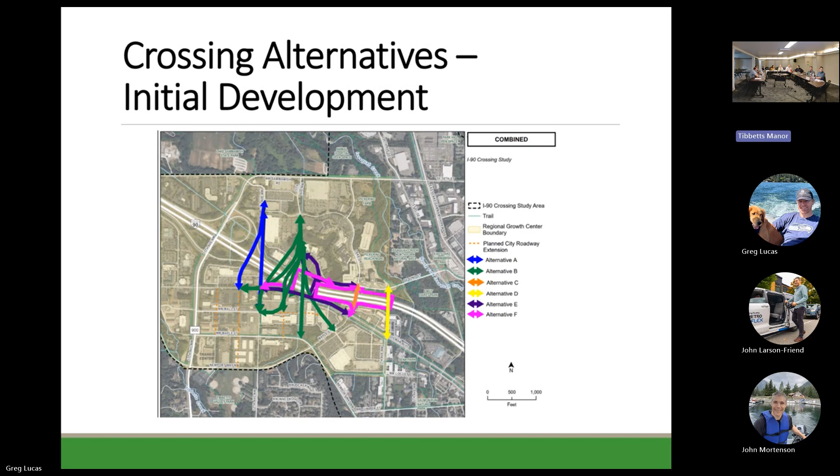Another challenge we have is existing grades, with I-90, Pickering Place and Gilman all being at similar elevations. It's tough to find enough length to get up and over. If I-90 were in a valley, it'd be a lot easier to connect. So we've got to find enough runway to get up and get clearance over.

This is a challenge for us. As we're going through this, we're trying to limit impacts both to existing businesses and structures, as well as thinking about how we think it's going to redevelop, to minimize the impact to future developments. The limited termination points that exist today make it a challenge as well, especially on the north side.

And then we want this to be user friendly. We're trying to make this so everybody's going to want to use it and kind of activate the area. And so after we applied all of these challenges, we kind of narrowed down to 5 concepts.

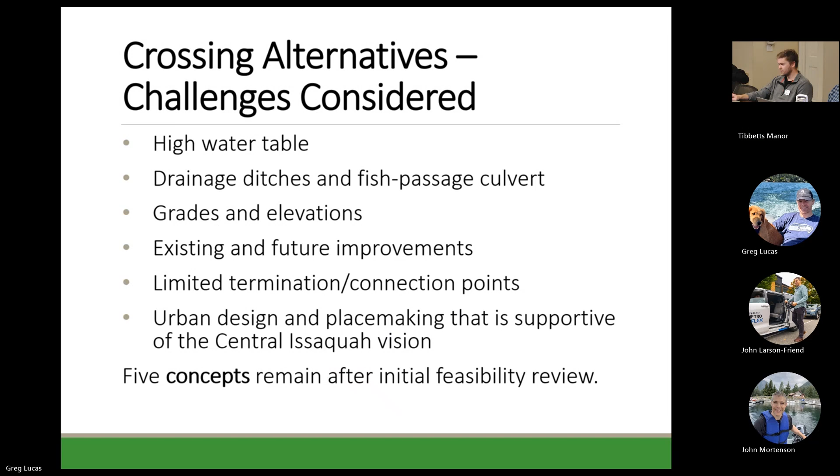Get into those next. More setup question here. I've heard the concept of a lid park thrown about. Is that something you guys are ever talking about, or is that just something I heard here? I heard that in Bellevue too. Well, a lid park, like over the highway.

Seems like whether it's an overpass or underpass would have some pretty big effect. Right, right. Well, I think we have enough lawyers surrounding that. Yeah, exactly.

So kind of working west to east, the first one is 11th Avenue on the north to 12th Avenue on the south. On the south end, you can see it meanders to the west in order to catch as much length to get more grade before we get to I-90. And then however much more clearance we need, we'll have to raise Gilman up, probably 3 to 4 feet, in order to make it work. And it goes up and over I-90, across the drainage area just north of I-90.

And a lot of these alignments aren't set in stone. We're working through this, so it doesn't have to go exactly like this, but we're trying to squeeze between the...

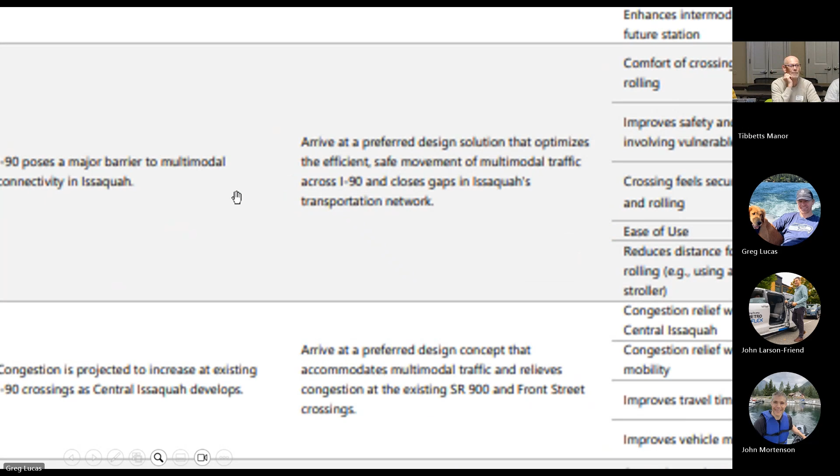One suggestion is the picture is really hard to read. I'm not sure, maybe I'll change that. Can you blow that up on the screen? A little bit, yeah.

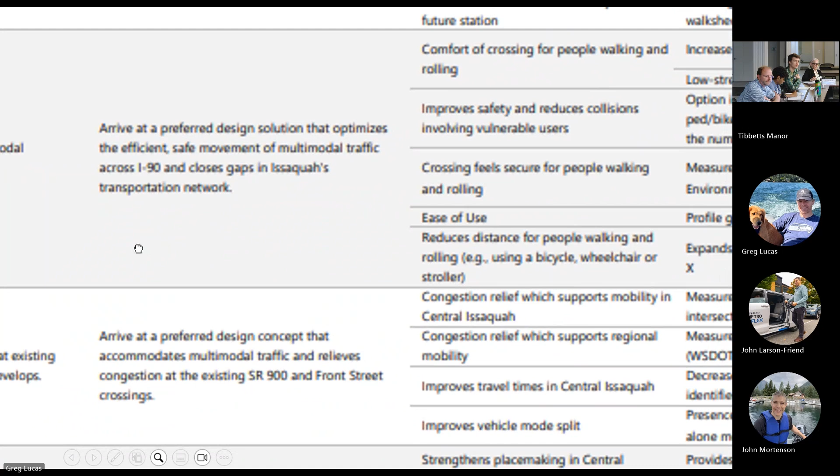All right, the next goal would be to arrive at a concept that accommodates multimodal traffic and relieves congestion at the SR 900 and Front Street crossings.

We're looking at travel times, regional mobility. That can make this project potentially more competitive for grants as well - a project that benefits the growth center, so we can make it more competitive.

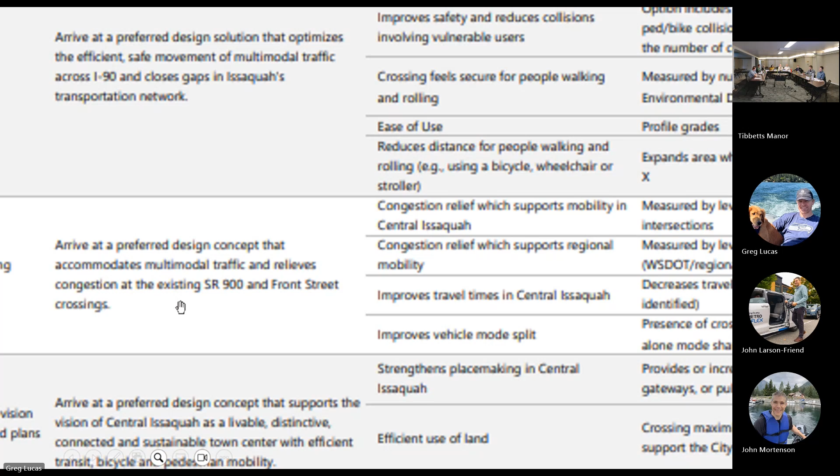Next goal is to arrive at a preferred concept that supports the vision of Central Issaquah as a livable, distinctive, connected, and sustainable town center. It's just how do the crossings meet the Central Issaquah plan?

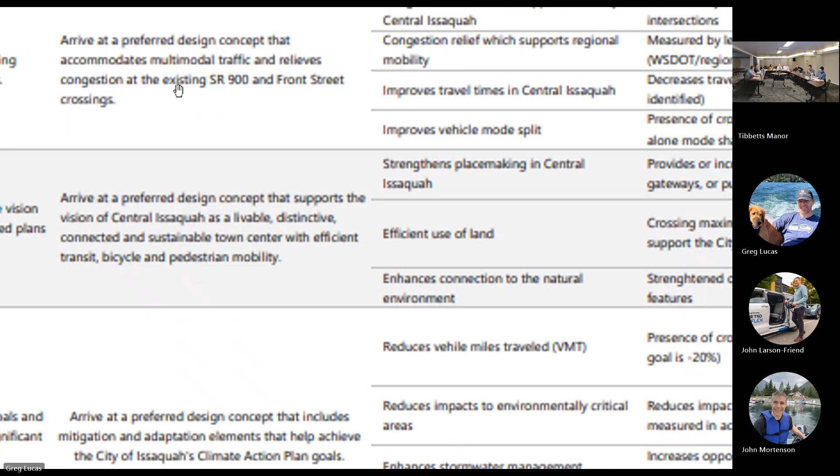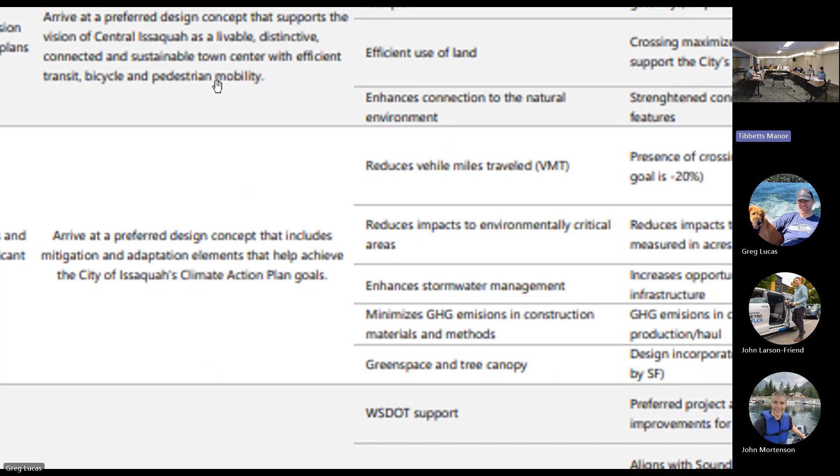Compatibility with that. The next goal: arrive at a preferred concept that includes mitigation and adaptation elements that help achieve the Issaquah climate action plan goals. We have two in here related to transportation - it reduces vehicle miles traveled and reduces dependency on vehicles.

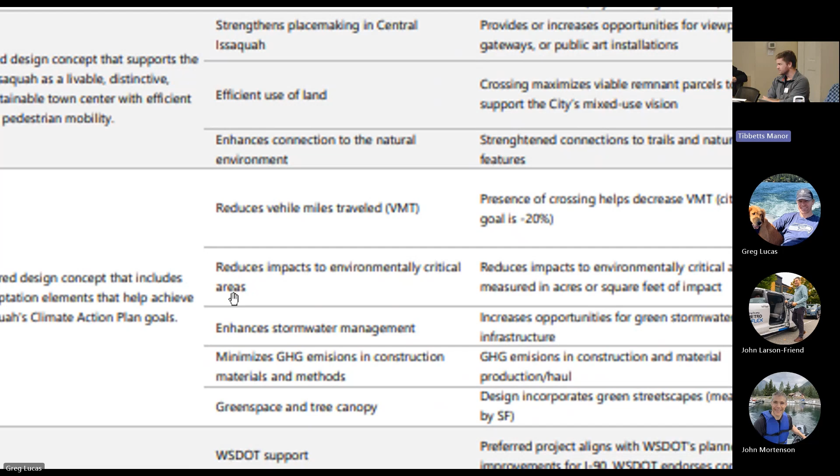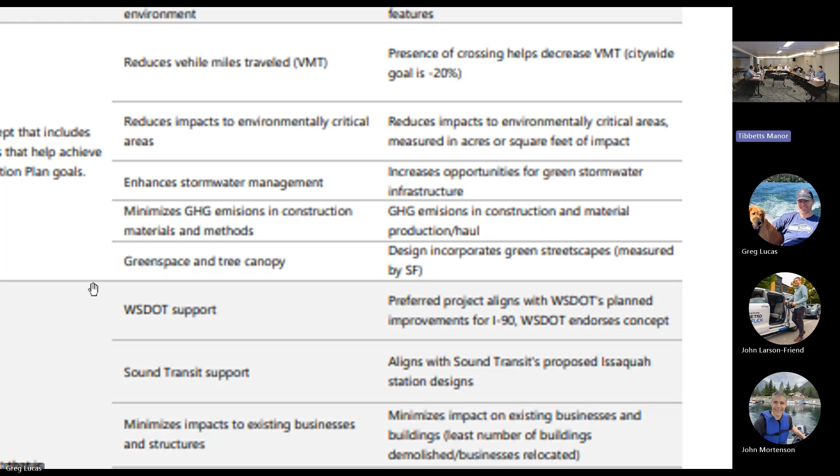The last performance measure for the category is design incorporates green streetscapes, measured by square footage. The last column is kind of initial - how we're going to measure what we want out of this. So those are definitely up in the air.

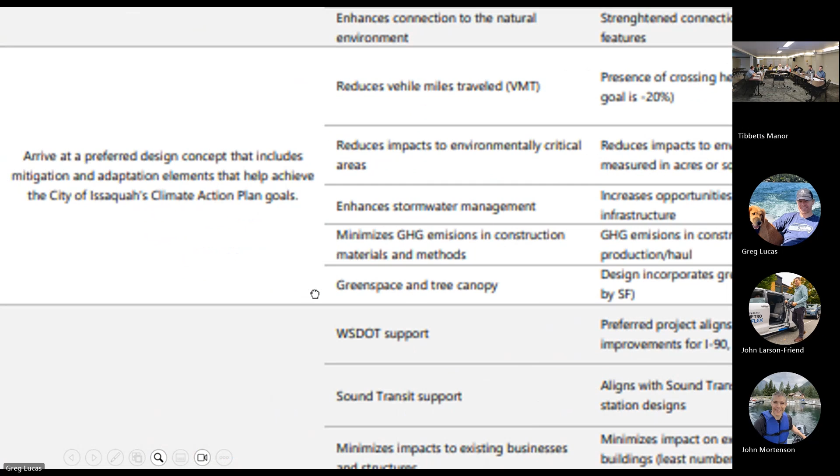Measure what we want - so that's what. Next goal is to arrive at a preferred concept that is constructible and eligible for funding.

Constructability, grant funding, minimize the impacts to existing businesses. I think also in here is reducing the amount of square footage of opportunity for future development.

What does it mean with this crossing increase 15 to 20 minutes, low stress walk shed bike shed? I guess those are two different things. Not sure what crossing increases 15 to 20 minutes.

Just in general, the easier it is to walk around, the more people will do it instead of getting in vehicles and driving around - more people that can walk to where they want to go instead of vehicles. The walk shed is an area on the map, and if you can increase the size of that, it's covered by how far you can get in 15 to 20 minutes low stress. That's what we're talking about.

So is it projected that there's going to be more housing in this area in the future? It's not like there's a ton of housing right there right now. No, but this is to go along with an expansion project that involves putting more housing there, so they're going to need to be able to cross the highway, basically. Okay, that makes sense - because I was wondering if there's anyone that wouldn't be able to walk across there right now.

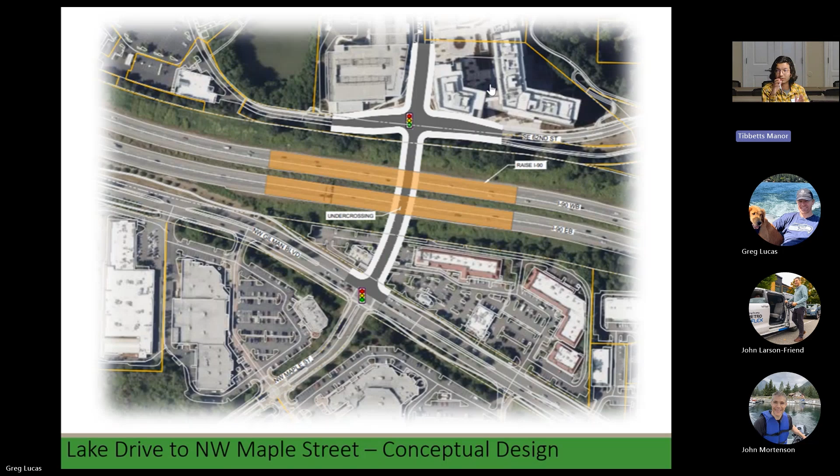If we want to go through, I think what would be most valuable for you in particular would be if we were to go through and talk about what we think about how each of these alternatives would align with these project goals and evaluation criteria. I'm not sure if everyone has had a minute to think about it, but since we are in downtime, everyone can take a minute or so just to explain what they think about the alternatives and how they align in their opinions.

So anyone can get started, but just take about a minute per person.

I think for this first one, one of the things listed is reducing congestion on SR 900, and I think this would help a lot with that. Whenever I'm trying to go somewhere after school, like the gym or a sports thing, I need to go across SR 900 to get from the south side to the north side, and that road just gets so backed up. So I think this would really help fix congestion.

But at the same time, it could cause potential issues, especially at the end of 11th, where there's that T intersection with SR 900. That intersection gets really backed up with traffic coming from the Fred Meyer area, back to where South Cup is, and then across the bridge toward the south side. So that could be a potential issue if you're adding a bunch of cars from another I-90 crossing. That intersection could just become a huge mess, which needs to be accounted for.

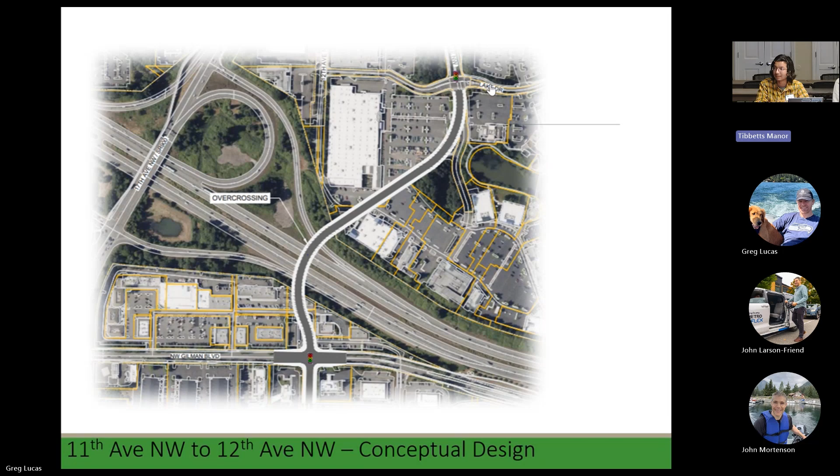For our last few minutes discussing this, I think what we've done is kind of excluded alternatives 1 through 5 as options, unless anyone disagrees with that. I don't think I have enough info yet. We don't know, I don't think we answered that. These are concepts, I don't think they can be decided yet.

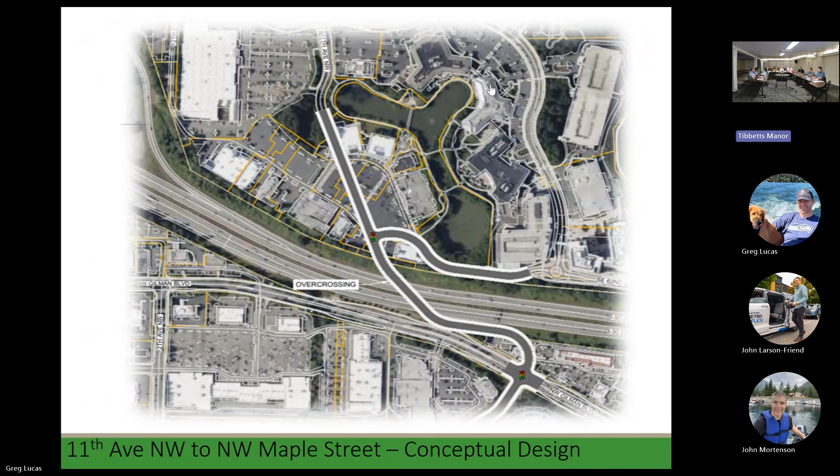This is problematic though. So Audie, I was wondering—one of them, number 2, right? That was lowering I-90, and number 4 is raising I-90. Do both of those have similar impacts on how it'll affect traffic on I-90? Will one of them mess it up more?

Not that I can think of. The only thing that jumps to mind is this one's going to have the challenge of the box culvert, which will really be a fixed elevation—you can't lower that box culvert once it's in. So that's the biggest challenge with lowering I-90.

Okay, but both of them will impact traffic. Yeah.

And you mentioned something about creating developments around that. Are these developments, or housing, going to be targeting low-income families, medium income? Is that something to consider? Potentially. Not like exorbitant expensive.

Right. I don't know how all that fits in with this project, but a concept like this would fit very well if a developer, say on the south side, was very interested in figuring out how this would integrate with it.

Parking's a challenge to go down in a structure on a development for the same reasons as going under this. And so raising Gilman could be a benefit for a developer.

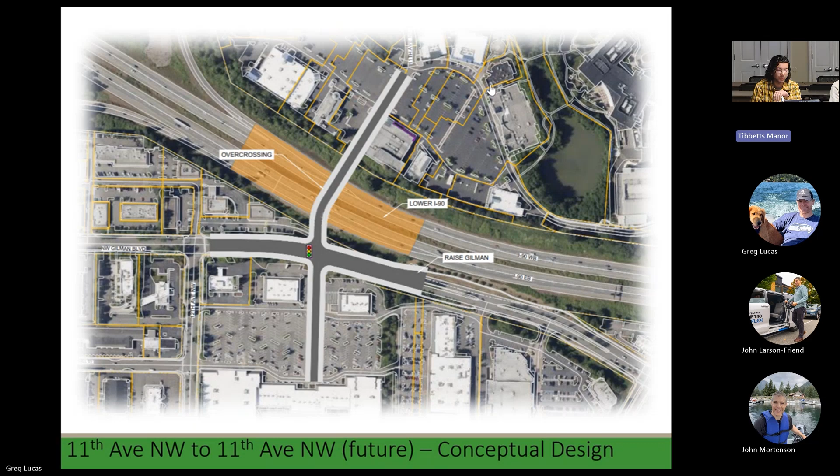One last query for you guys to think about. How about impacts on green space? How are you guys weighing the impacts of green space, particularly for alternative 3 with that roundabout? Because that's a more wetland area next to the Fairgroves lot. And so I thought, planning wetland, no big deal, column in, bridge over.

You're gonna get the bid for that, Tom. Six-foot diameter impact—you can always mitigate that somewhere.

I'd like to see total paved area as a criteria, so like delta—how many acres are we paving for this?

Did you get—does anyone else have any comments? I think as far as green space goes, for most of these projects, it looks like a relatively small reduction in green space compared to other sorts of projects, especially since a lot of it is going through the air. And yeah, I don't see that being an enormous impact.

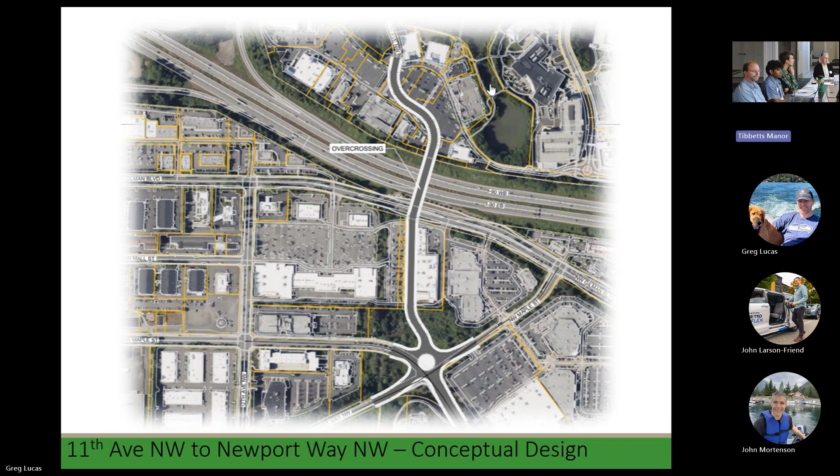All right, so next steps for us: we've got our open house, we've got the survey going on, other presentations we're doing for this. We're going around introducing the projects, getting feedback early, and then we'll be refining two or three concepts further, trying to get it visualized with the architect and see how it looks in actual three-dimensional space, meet the criteria, and match up alternatives with the criteria. We'll continue to reach out to transit and others, and we'll have a couple council meetings mixed in there as well.

More questions? Do you like any of these design concepts? They're all a challenge, and I've wavered on which one I like the most quite a few times. But it's a fun exercise because part of the challenge is figuring out what is the future of Central Issaquah and how does this fit in, not just in 2024, but in 2034, 2044.

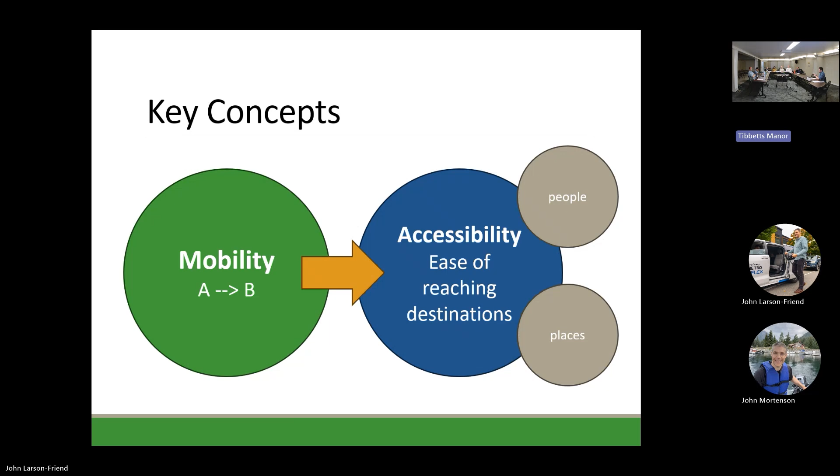Equity is the concept of the fair and just distribution of resources, opportunities, and treatment, ensuring that all individuals and communities, especially those historically marginalized, have access to what they need to thrive.

And this one is the piece - the big main takeaway that I want you all to walk away with. If you don't remember anything else, this is the one thing I would love for you to take away from today: an equity lens is a systematic examination of how different groups will likely be affected by proposed decisions. It's used to eliminate and prevent adverse consequences.

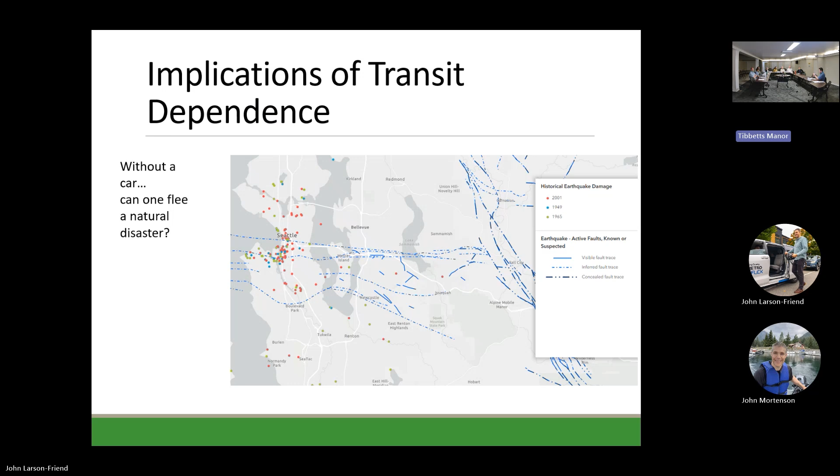And the city of Issaquah is asking those questions. The city is integrating transit-dependent residents into emergency plans. I talked to the emergency manager, and his example was they're integrating transit-dependent folks into the wildfire integration study that we're doing now.

There are several factors that go into that, but a few include economic inequality - white households generally have higher incomes and more generational wealth. Credit access and loan terms, racial discrimination - the auto loan market is well documented, with Black, Latino, and Asian borrowers often facing higher interest rates versus white borrowers. And historical and systemic barriers - factors like redlining and discriminatory lending practices have long-term impacts on wealth accumulation and access to credit in general.

I'll talk about COVID. COVID obviously was a huge disruptor - it really tested our society's systems. Here in King County, transit service got multiple cuts along the way.

In order to get tested, some people only had access to drive-through testing - I don't know if you all did drive-through testing, but I certainly did. So the question is, who is making these emergency decisions? What services were cut versus being preserved? There's probably a very good chance that areas of lower ridership, which serve people who need transit most, were cut first, as opposed to the core of King County's system.

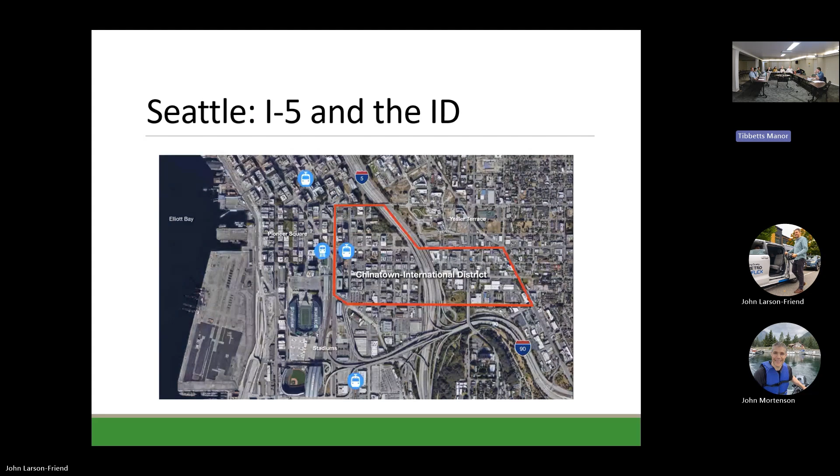And of course, we know Seattle is split in two by I-5. I-5 broke ground in 1957 in Seattle. It took 12 years to complete, and it basically went over the heart of the center of Asian American culture in Seattle at the time.

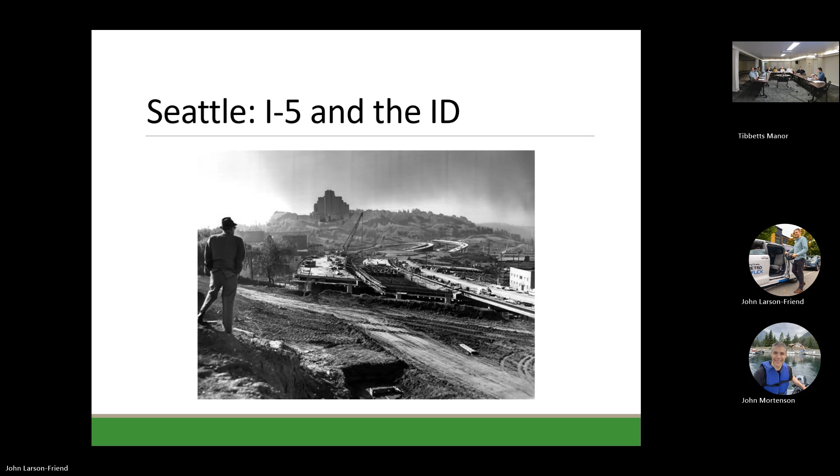This is the only picture I could find of a building in that area being demolished for I-5. There's not a lot, it's not very well documented. I couldn't find the number of buildings destroyed, but we know it displaced many people and destroyed many businesses, and most were uncompensated by the city or state. Not required to compensate. Yeah, just take it.

There's a really cool exhibit, but more accessibly, a story map online called Nobody Lives Here. It's a walking tour you can do, but you can just look around and it'll take you through some of the businesses and really cool buildings that got torn down that were in the center of where I-5 is now.

In Seattle in 2020, it was 66% white, 16% Asian and Pacific Islander. In 1960, when I-5 was put over the top of this area, Seattle was 91% white and 3% Asian and Pacific Islander, most of whom were concentrated in that area. So really devastating to that 3%.

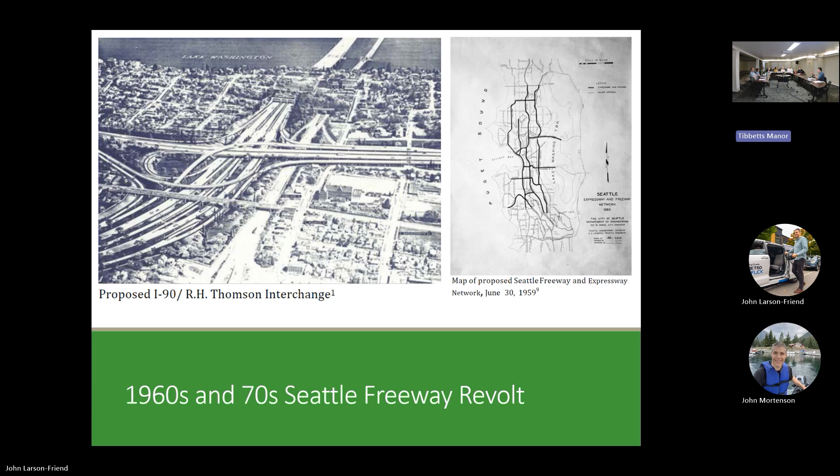Seattle, I think we're probably all fairly aware of the history of racial disparity modernly in Seattle, but this is a really glaring statistic. Between 2010 and 2016, Black people made up 7% of Seattle's population, but they got 26% of the jaywalking tickets.

Who hasn't jaywalked? There are jaywalking tickets? Oh, yeah, yeah. Not for you. Careful, cell phones.

Very different context from Seattle. Didn't have to blaze through communities to build I-90 or anything like that. It was all farmland, all eminent domain, but minimal impacts to the community.